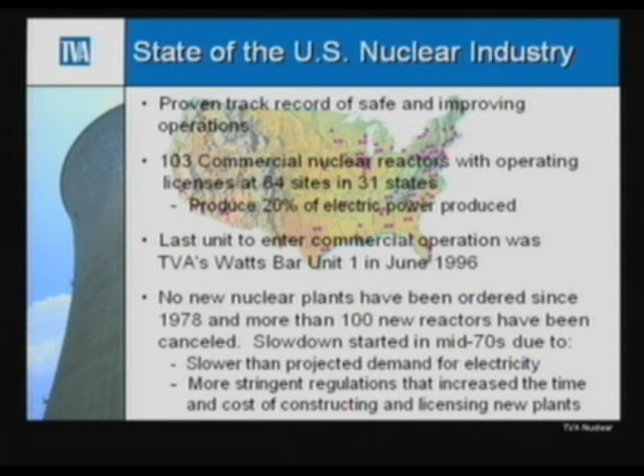Okay, 2 slides, 2 clicks, I'm on a roll. Forecasts for the future. Right now we're looking at about 393,000 megawatts of power that we're going to need in the country. And that's arguable. You'll see the numbers in front of you. The growth rate will generate about 1,300 to 1,900 plants. That's at about 250 megawatts a plant. A nuclear plant nowadays will run at least 1,000 megawatts. It's just too inefficient to run them at any lower power levels than that. I mentioned the capacity increase throughout the country has added virtual nuclear power plants. TVA contributed to that.

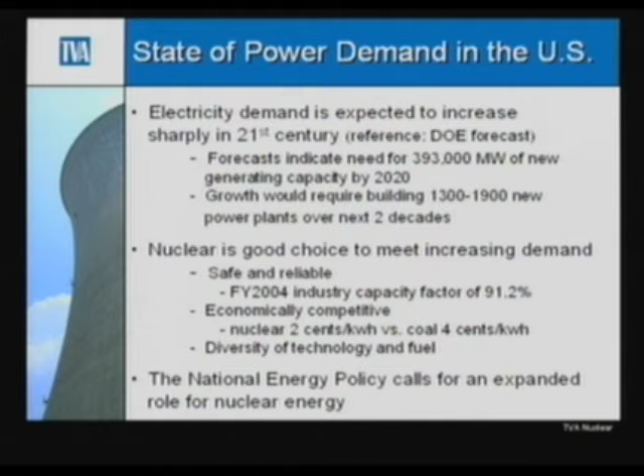We had our best year ever last year for equipment reliability, with only 6.2 effective full power days lost for all 5 units. So TVA is contributing to the renaissance there. You might have noticed last night, if you listened to the State of the Union address, that nuclear energy was mentioned again by the President. And the current policies are certainly supportive of new nuclear plants as well.

Okay, let me talk now about TVA. The agenda here is I'm going to talk broadly about TVA and get more and more specific about TVA nuclear, and then some of the projects we're working on and some things you may have read about in the papers about TVA nuclear. But first of all, let me start by saying that TVA is not just an electricity company. It's a different kind of company altogether.

And as Dr. Dodds mentioned, I came from the submarine force in the military, where I always had a sense of a broader mission than just getting a paycheck. And one thing TVA's given me is that same sense of a broader mission. I just don't generate electricity. I'm part of something larger than that. And I'm going to try to use more technology here.

So that's kind of like government on steroids, or government being agile and fast, and that's what we like to think we can do. And we've achieved it in many, many areas. What do we do? We call it the 3 E's. We do economic development. That's just bringing jobs in the valley, making the valley a place where you want to move your business and move your people to. Energy, that's electricity, providing electricity to folks who need electricity to run their businesses and power their appliances in their homes.

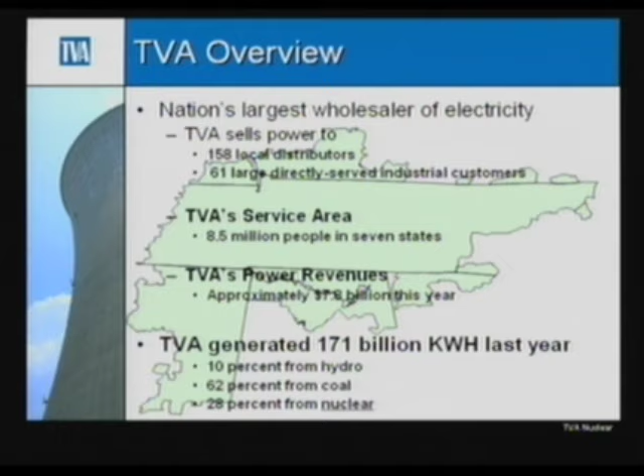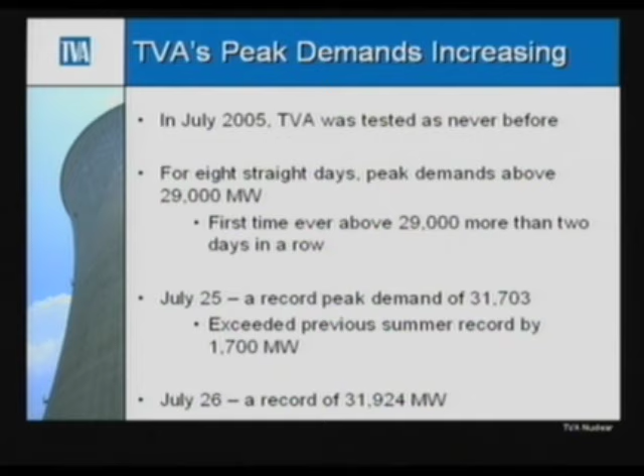Okay, we had a big test last summer. In July, we had 8 peak days in a row, and that tested us pretty severely. During those days, we had peak demands all 8 days over 29,000 megawatts. It was the first time ever we had more than 2 days in a row. We had 8. During that time, the nuclear and fossil fleet met the demand. We ran at 100% power in nuclear every one of those days, flat out. And then on July 26, we set our highest record ever at 31,924 megawatts.

Okay, now locally, where do we think demand is going to go, and how does that play into TVA's future plans? Right now, our typical or average forecast is for 1.4% load growth. Now, those of you who might think you wasted your time in statistics class, you probably didn't, because this is a family of curves. It's a statistical probability that we lay out, and that's how we determine what the most likely is. But we also look at the 90% chance and the 10% chance, and we manage our risk based on that.

When you go through that analysis, you come up with your best estimate of about 1.4%. But to give you a feel for the span, it goes as high as 2.8% and as low as minus 4% in actual load loss. But the most probable is 1.4.

So when we lay that forecast out and go into the future using our family of probability curves, we come up with a most likely scenario that says somewhere in the mid-2012 to 2018 timeframe is where we will need more baseload power of any significance. And that's how we manage our planning process.

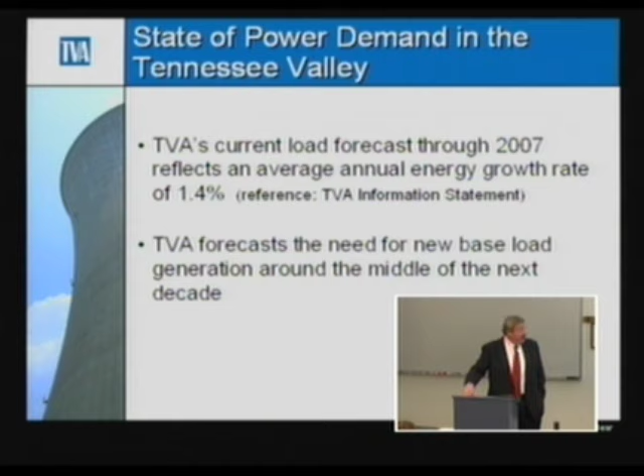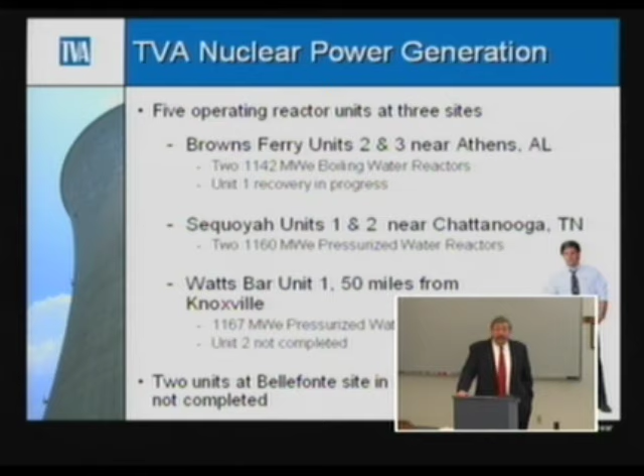Okay, now getting a little more specific to nuclear. We have 5 operating units, and we have a 6th unit we're starting up at Browns Ferry Unit 1. That project you may have read about is getting a lot of attention. That's something TVA is really taking a leadership role on. In May 2002, the board made a pretty gutsy decision to go ahead and start that unit, knowing that large nuclear projects aren't out there. We have the only large nuclear project. That project's on budget and on schedule, and we're demonstrating to the country that you can do a large nuclear project and be successful, and we feel the pressure of that.

Senator Lamar Alexander, and I'll paraphrase, I won't try to quote him, in one of the energy hearings basically commented that the eyes of the nation were on the performance of Browns Ferry Unit 1. So we feel just a little pressure when we hear things like that. But we're on budget, on schedule. Things are going well there.

The team's delivering. Sequoyah, 2 units at Sequoyah and then 1 unit at Watts Bar. I'll talk about Watts Bar Unit 2 not being completed in a few minutes. You've also probably read a little press about the 2 units at Bellefonte and a relationship we have in a consortium called NuStart, which I'll also talk about in a minute or two. So that's TVA Nuclear: 5 operating units at 3 sites, 1 unit coming up to make 6.

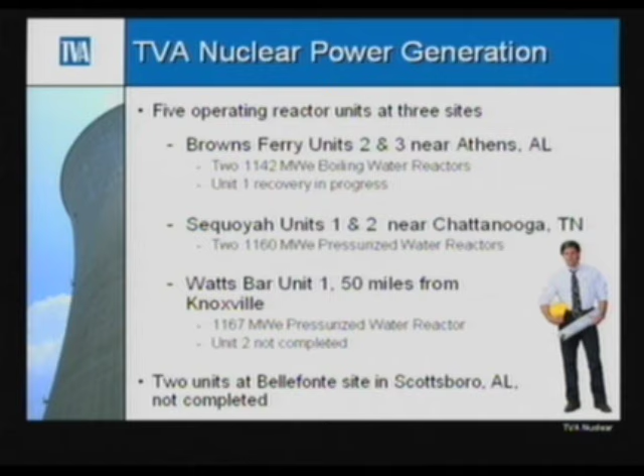Browns Ferry Unit 1, I mentioned earlier, is a $1.8 billion project - billion with a B. It's $1,800 million. I keep reminding everybody how much money that is. We're on schedule and on budget, and it will add a lot of confidence to the rest of the industry that's watching it when we deliver on time and on budget. A lot of things have to go right in a regulated environment for us to be on time and on budget, so that'll be a strong demonstration.

License renewal. This is one of our specific projects I'll talk to you about today, and it will essentially extend the life of our plants. Our plants were licensed for 40 years originally, and this will add 20 years on top of that. It involves extensive engineering analysis of equipment to make sure the equipment, particularly safety-related equipment, can sustain another 20 years or perhaps need to be replaced or require a different maintenance program. So there are many options we could do, but we have to demonstrate with confidence and reliability that these units can operate that much longer safely and reliably.

Sequoyah and Watts Bar have not been submitted. Browns Ferry was, as part of the Browns Ferry 1 business decision. The decision was made it was not cost effective if we could not also extend the license. So that's why we did Browns Ferry first. Sequoyah will be the next one we do, and then Watts Bar after that. Watts Bar being our newest plant, we have a lot of time before we need to extend its license.

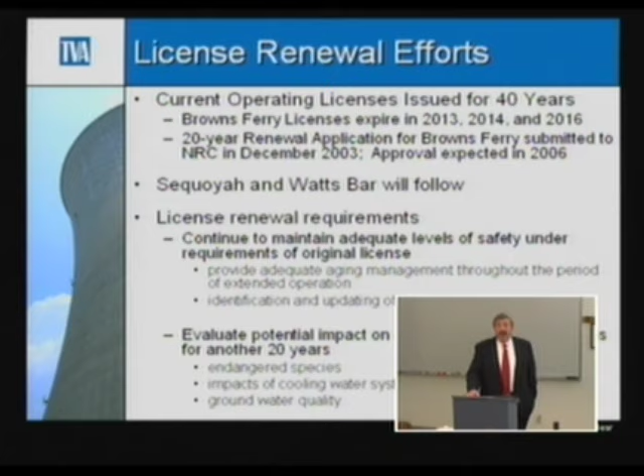The requirements I mentioned earlier are primarily aging equipment management. How can you demonstrate to ourselves, to the regulator, and to the public that we can continue to operate these plants safely, and how do you know your safety systems are going to be just as reliable in the future with another 20 years added on as they are today. We have to also evaluate the potential impact on the environment. Everything we do of this magnitude requires an environmental impact statement, and of course we went through that process at Browns Ferry Unit 1.

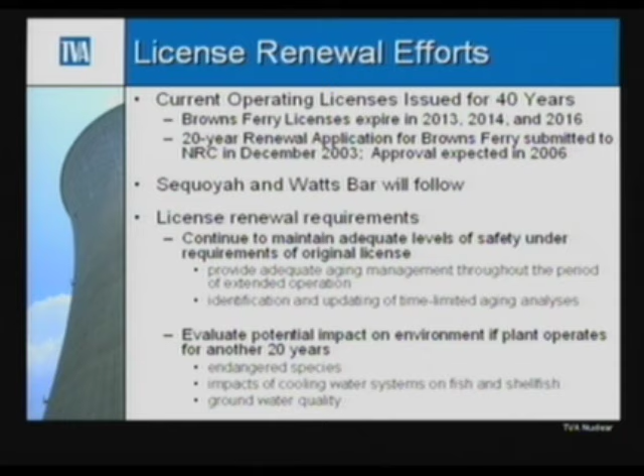Extended power uprate. This gets a little bit more interesting, and we throw some different kinds of numbers at you.

You'll see power numbers like 3293 instead of 1200, which you saw on some of the other slides. This is megawatts thermal - we do that just to confuse you, as opposed to megawatts electric. Megawatts electric is the electric power we put to the grid. Megawatts thermal is the reactor power.

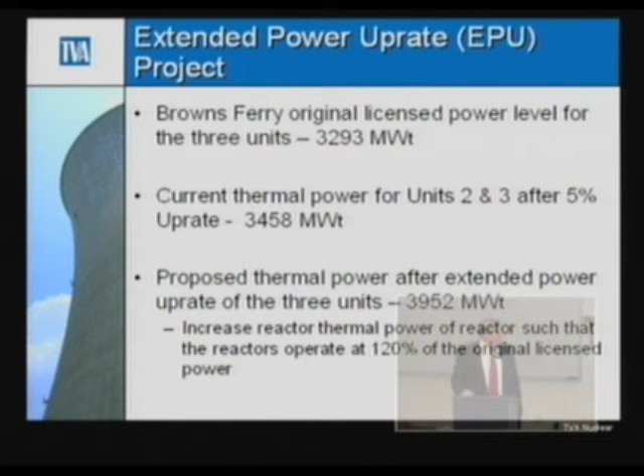Most of you are engineers and smart people, you've probably already done the math - it's about 37% efficient. I see the smiles of people who did the math. So we generate about 3,293 megawatts of energy in our core, and we deliver to the grid about 1,200 or 1,150 megawatts. So what this uprate does is essentially raise our reactor power levels and our deliverable power levels such that we get 150 megawatts of electric more.

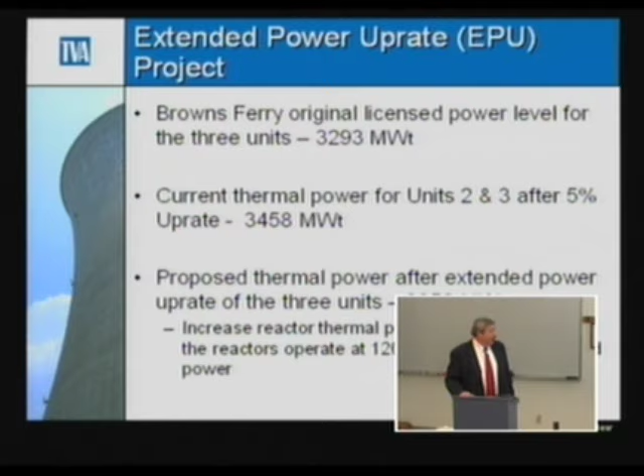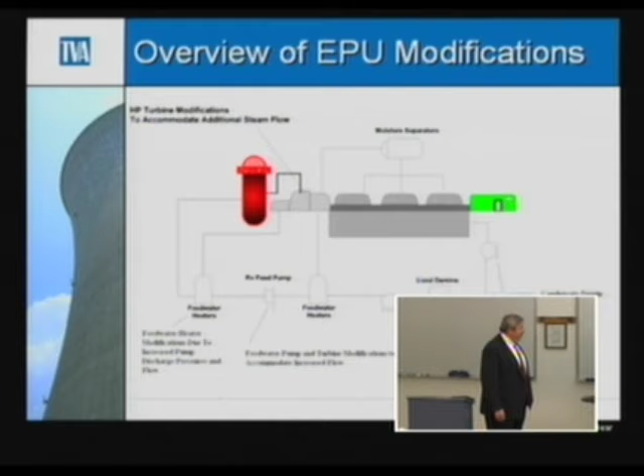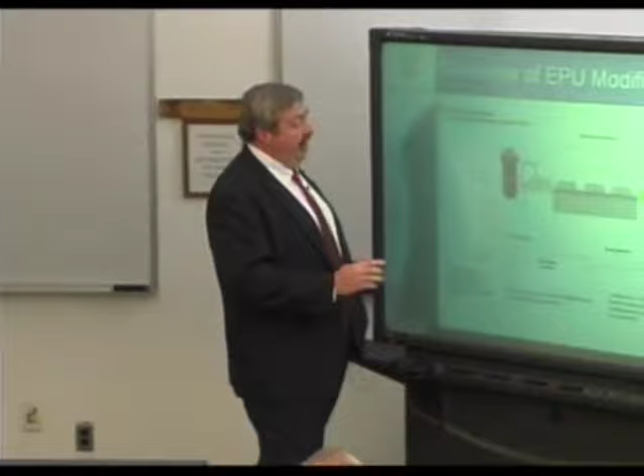That requires a lot of things, so we brought a pictorial here I'll talk through. This is a very simplified schematic of our power plant, and for those of you who can't read it, I'll talk through it. We have our reactor in an uprated condition. We've got to get a lot more energy out of the reactor, so we have to load more fuel, but we want to run it just as long a period of time, so we have to run it at a higher power density. We'll have a higher power density core that can provide the energy we need to get the additional power.

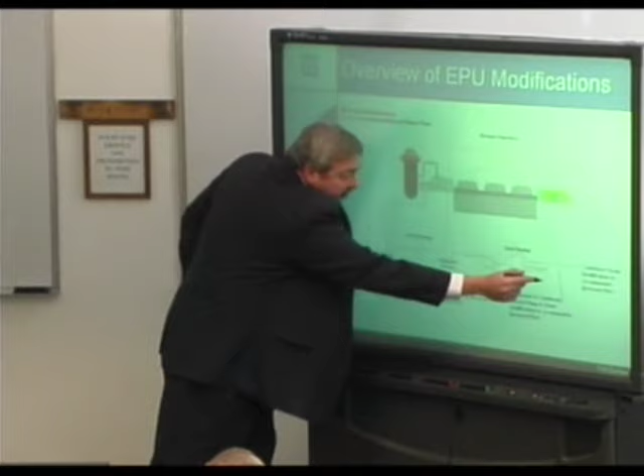The turbines require some upgrading, particularly because of increased steam flow and velocities through the turbine. Then this train down here is essentially your water train coming back to your reactor vessel after it's been condensed, and that train requires a lot of new pumps, valves, and motors. Higher energy requires higher flow rates - just bigger pumps, motors, and valves.

Heaters have to be replaced - this is where we recapture some of the heat to get our thermal efficiency up. So we make changes in there as well. And then a lot of core parameters have to be changed, and we have to demonstrate it's safe to run at the higher power densities. So that's what the uprate project will do.

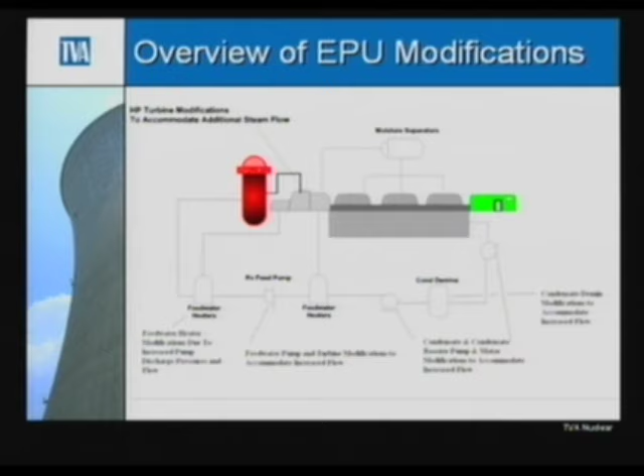Okay, one of the other projects you might have read about was our steam generator replacement at Sequoyah.

Yeah, you have to do this too. Anybody know any good jokes? Thank you.

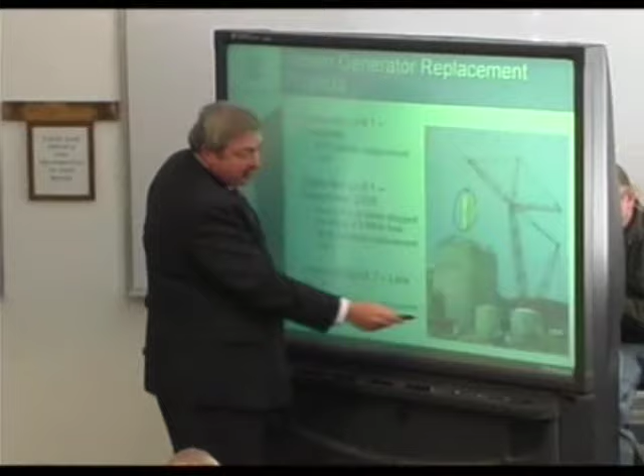Okay, steam generator project - we did replace them at Sequoyah. That's a huge project. You really don't get a feel from this picture how big these steam generators are, but this is a steam generator going into containment. A lot of you may have seen containments from the road or from the river - they're huge. This is a person right here, that's one individual, so you can get some sense of height.

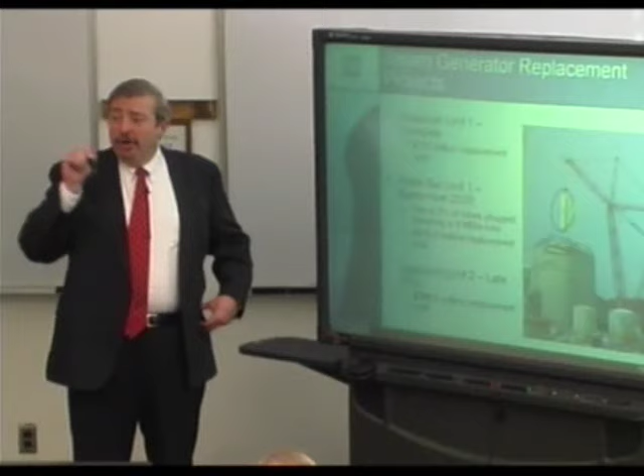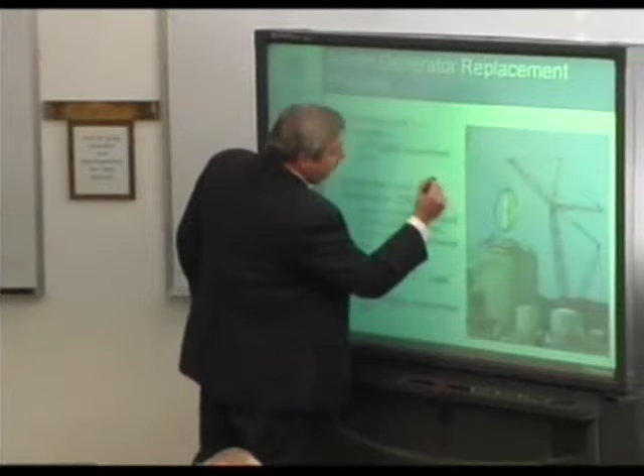What we did is cut two 24 by 45 foot holes in the top of this concrete. We did it with 2,000 psi water lasers that essentially cut into the concrete and rebar and circle it out. Now you might wonder, how do you keep it from falling down? You cut it on a bevel such that it can't fall down - it's supported by the rest of the containment.

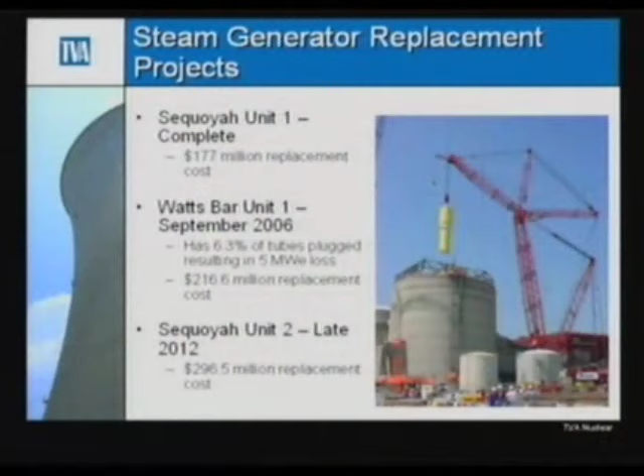This project required the world's largest mobile crane. It came in on 145 tractor trailers, which, as you might imagine, was a nightmare for our security force, who had to search every one of those trailers head to toe - 145 of them. It took 18 days just to construct the crane. Then we had to build an elevator up, a platform on the top, start our hydrolasing, and then load 4 of these, get 4 out, and then load 4 back in.

Large project, you can see the costs. And there's a big difference there, and it might interest you to know the difference is not just labor or normal escalation - it's the price of materials. Tubing, things like that in the world have gone up dramatically, and so the cost of doing these large projects that require a lot of materials has gone up very dramatically.

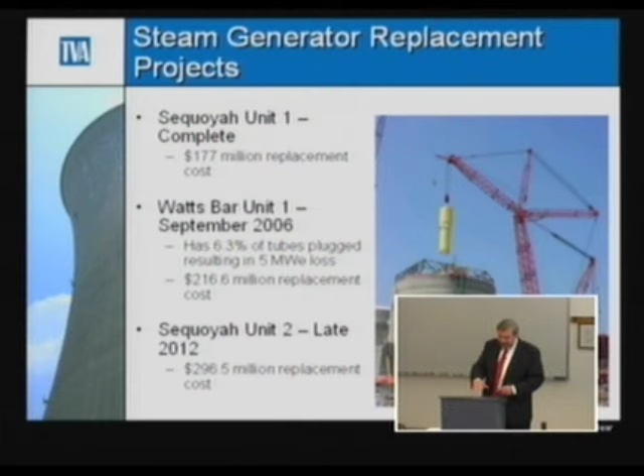I mentioned the nuclear renaissance, a term that's out there describing the condition where people are talking about building new nuclear plants, but no one's actually committed to build one. We're part of 2 consortiums. One is an advanced boiling water reactor consortium, and I'll tell you it's kind of dormant right now.

That technology hasn't taken off and probably won't, because it's not being pursued very aggressively by the vendor, who has an advanced technology they prefer for the industry to go to. Although these reactors are already built in Japan, which minimizes our risk since we know they can be built and run, there's not enough interest in the United States to generate more than 1 or 2 utilities that will buy it, and that affects our supply chain.

You don't want to be the only one who has one type of reactor, because it'll be hard to maintain over the life of the plant. You want to be part of a larger group so you can have a supply of parts and materials and fully leverage standardizing procedures and the way the equipment operates. So that's dormant right now, and I think most experts would tell you we don't expect to see a lot of activity in the advanced boiling water reactor arena.

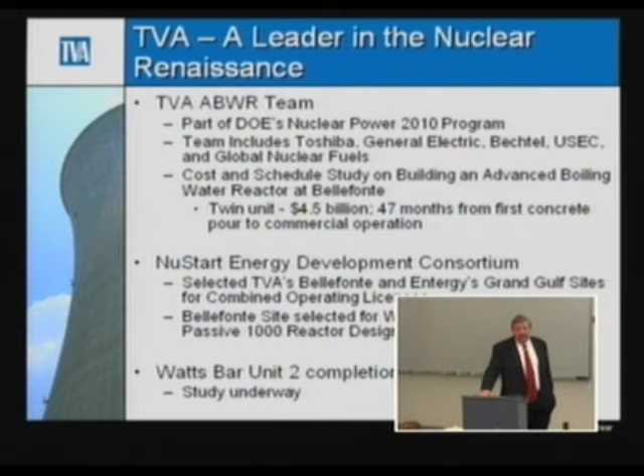The other arena is through a consortium called NuStart that we're participating in. The Bellefonte site and TVA were selected for a combined operating license for technology called AP1000, marketed by Westinghouse. It's a pressurized water reactor technology, and several utilities have signed up to develop early site permits and combined operating licenses that would eventually construct that technology.

Just for clarity, the papers don't always get this exactly right. We are committed to do a combined operating license, which would essentially develop the engineering behind how you would build a plant, and it would be approved by the Nuclear Regulatory Commission. But we are not committed to go on with construction yet. That's a decision that will be made in the future, and it'll certainly be something our new board will want to ask questions about when they are finally confirmed. The other activity we're considering is Watts Bar Unit 2.

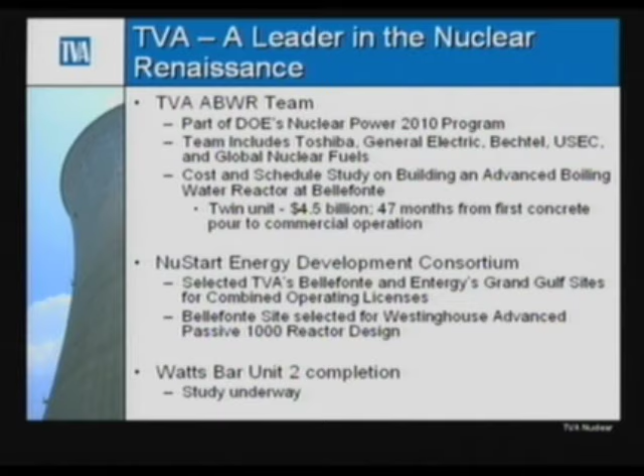Watts Bar Unit 1 is up and running, as I mentioned earlier. We have Unit 2 partially completed, maybe half. Watts Bar Unit 2 is slightly less than half maybe. We're considering doing what we did at Browns Ferry there, essentially cookie-cutter the next unit at Unit 2. So those are our alternatives in the future: something with NuStart and Bellefonte, and something with Watts Bar, neither of which we've committed to.

Summary of our generation position: our primary focus right now is successfully completing Browns Ferry Unit 1. I mentioned how important that is to TVA and the rest of the industry, that we be successful in doing that. Our preferred path for any kind of formal construction of magnitude in the future would be to have a partner—a local company, maybe utilities, or a combination of folks who would partner with us and share in the risk of developing whatever the next generation would be.

And continuing to study the options. We're very aggressive at trying to understand our future, and very aggressive at producing good modeling techniques that result in good, solid business decisions.

One thing I thought I'd share with you that you probably wouldn't get in a class or a newspaper article about us is something we talk about in every one of our management meetings, where we get together about quarterly and discuss how we can be better leaders and managers. That's what we call safety culture. It's not something you'd use every day as a student, but if you're going to be in this industry, you'll eventually have to develop it. I challenge you to look for opportunities where it may apply to what you're doing today. I'll cover a couple of them.

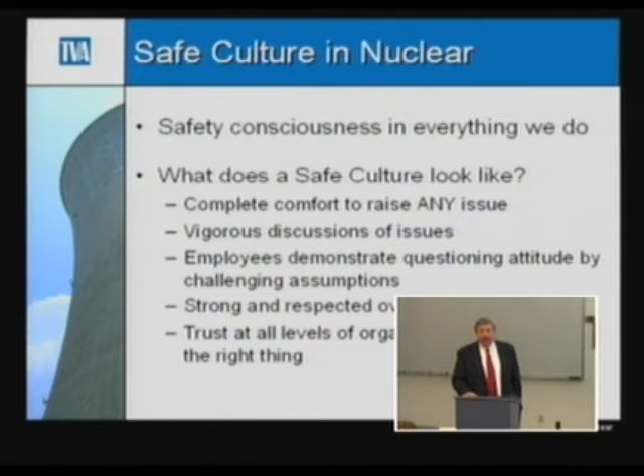We're committed to safety consciousness in everything we do—everything we do. What does that mean? What does a safe culture look like? It means people can raise any concern they have without fear of retribution. If you see something that's not right, we expect you to bring it up. Lots of discussion about the issues, and employees demonstrating a questioning attitude. We encourage that—we want people to question us and challenge our assumptions, especially.

How do we know it's okay? How do we know it's right? Strong and respected oversight—having organizations that are strong and can tell us where we need to improve. And last but certainly not least, trust at all levels of the organization that we'll do the right thing.

We want people to know that we will do the right thing. And that's the end of my presentation. I'll be glad to answer any questions.

Yes, sir. When I last toured the TVA nuclear facility control rooms, I noticed that the control systems and what I saw on the panels looked quite obsolete. I saw strip chart recorders, analog meters, hand valves, the whole bit. I was reminded of a World War II submarine movie.

Now, in the report from the Three Mile Island accident, it was recommended that the nuclear industry go to something like a human factor, microprocessor-based system that would analyze incoming data, prioritize it, and eliminate this problem that appeared in that accident of everything lighting up at once, so that operators would have a prioritized procedure for dealing with the situation. Now, is that going to be fundamental for the new reactors you'll be ordering?